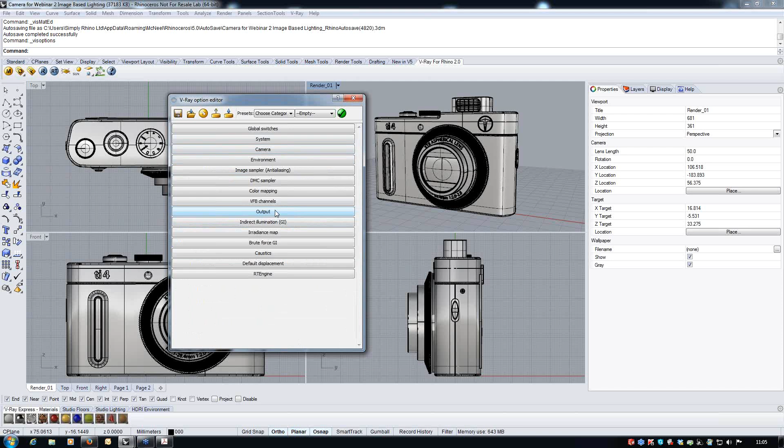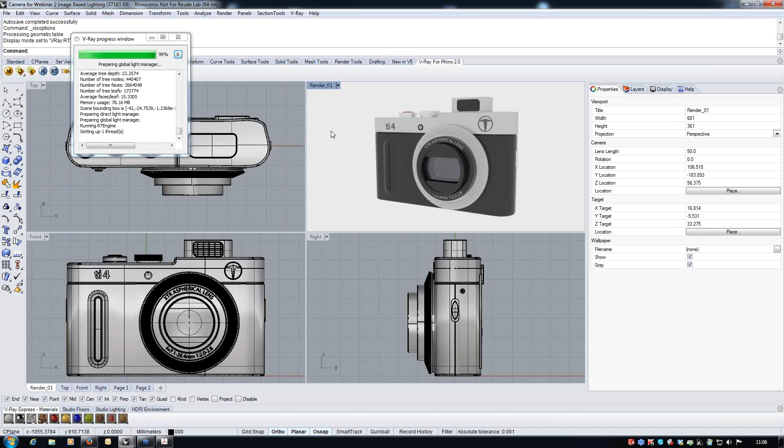We already have materials applied to this scene, and if I just turn on RT for this scene here, we'll see that the materials are applied, but because we've got no ground plane or reflective environment, then everything looks rather uninspiring. So let's look at quickly loading in a couple of things that can start to make our scene look a little more worthwhile.

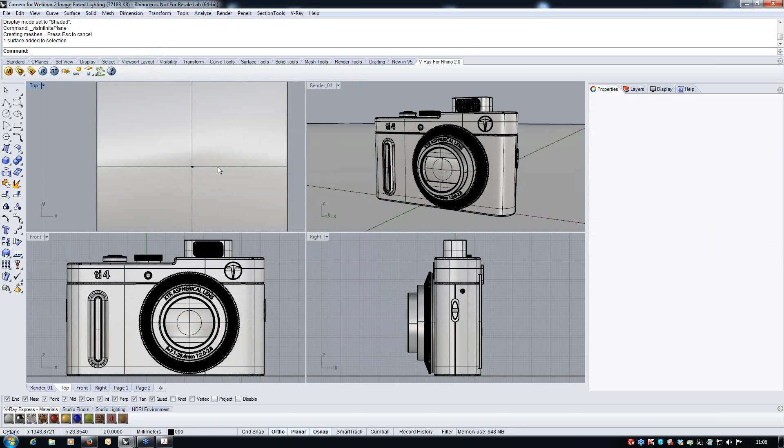So first of all, I'm going to load in a ground plane, and in this setup I'm going to use the VRay Infinite plane. Now this plane, when you see it in Rhino, actually has a finite size to it, but when this renders it extends all the way to the horizon.

This type of ground plane is good for a quick setup, but if you are doing something more detailed that requires any mapping applied to it, then it's not a suitable system to use. But for a quick setup, it's very useful.

Next up, I'm going to load in a VRay dome light. All of the VRay lights are contained in our VRay lights panel, which we can pull out from our VRay toolbar, and the dome light is this tool here. Now the metaphor for a dome light is a hemisphere, and we position where we want the center of the dome light and just drag out the cursor to give this dome light a size.

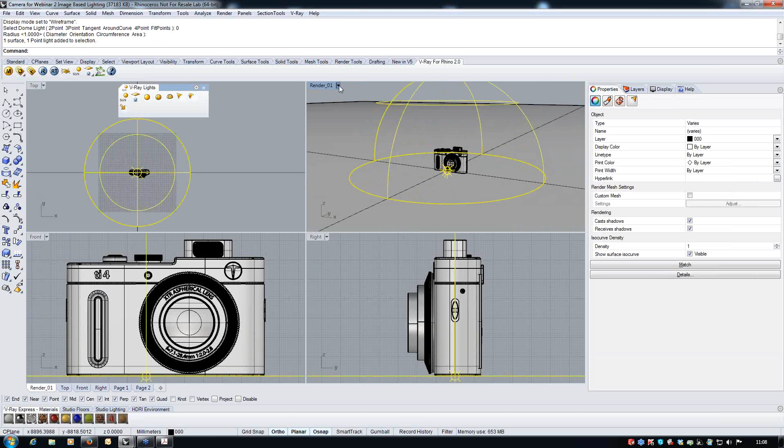It's important to understand that the dome light we're loading in here is really just a metaphor, so the size of the dome isn't that important. You'll see the dome actually surrounding the scene here, so don't worry if the dome is smaller than some of the elements in your scene. It really is just a metaphor.

Once we've loaded in the dome light, we can then pick the dome light and go to our light properties, and you'll see here that we have the option of being able to load in a dome texture.

In the last webinar we explained that there is a skylight component in VRay, and the dome light can be thought of as a sort of localized version of the skylight, with the exception that rather than the skylight, where the light is coming uniformly from all over the hemisphere...

...if we use an image to light with, then we will have directional illumination. The other big difference between the dome light and the skylight is that the dome light is real direct illumination, whereas the skylight is indirect illumination. So what that means is that the dome light will produce proper contact shadows, and it's fairly easy to produce clean results with it.

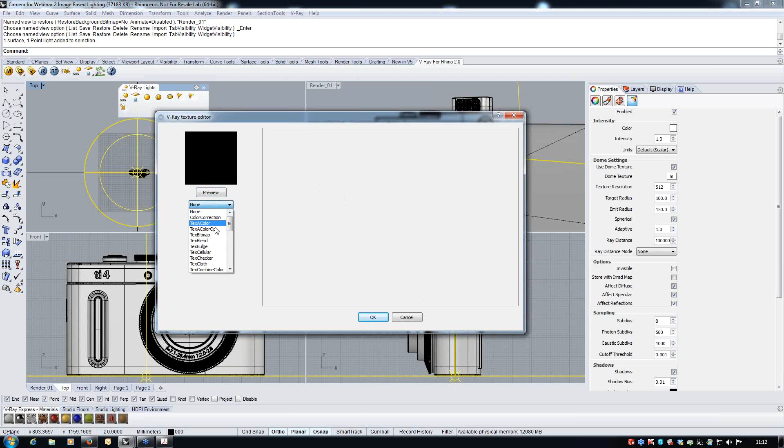Now this is the same VRay texture editor that we use for textures at all levels in Rhino. So that would be materials, lighting, environment, all use the same texture editor. So here we need to click a type, so I'm going to choose bitmap, and then I'm going to navigate to a folder I have of HDR images, and I'm going to choose this one here, which is Studio 10. On these images here, you'll see I've got little previews which show me what the lighting looks like from these. I'm going to load that texture in.

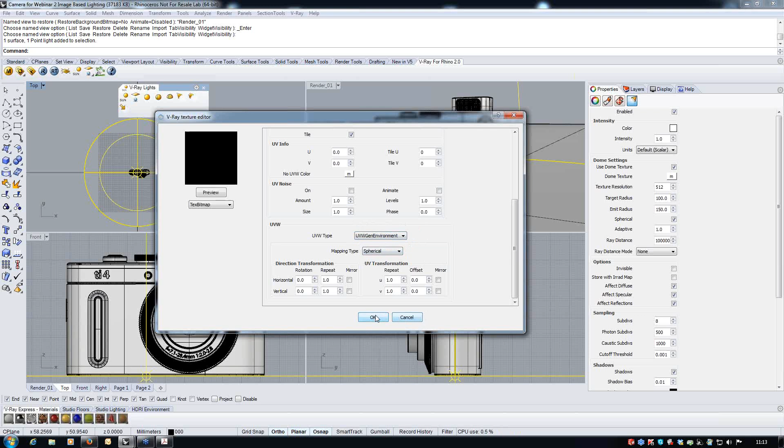Now, an important step that I need to do here is to make sure that my mapping type here, my UVW mapping, is set to environment. You should do this whenever you're loading in a texture that you're going to use for either a skylight, a background, or a dome light. And the mapping type here should match the mapping type of the image itself. So we can load that in and then look at my RT image now. And you'll see that we're starting to see some more realistic illumination going on.

So here, because we're not using the physical camera, I'm going to increase the brightness of the scene by increasing the brightness of the dome light. You can see here that as I change that multiplier for the dome light from 1 to 2, you can see the scene becomes brighter.

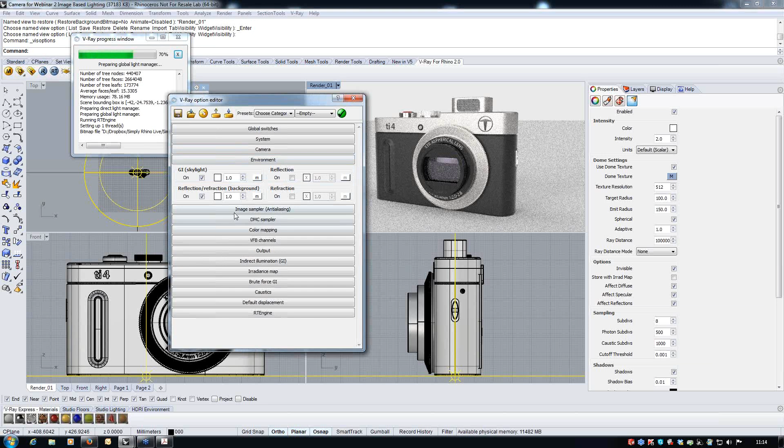Okay, now the other thing that you'll see here is that the dome light, the image that we use on the dome light, is visible in the background here. So if we want to make that not so, then we can go again to our dome light settings here, and we can check invisible. And now we'll see the white background that is created here in our environment tab. So again, very similar sort of way of being able to make the dome light invisible, very similar kind of setup to what we were introducing in the last webinar in the environment tab itself.

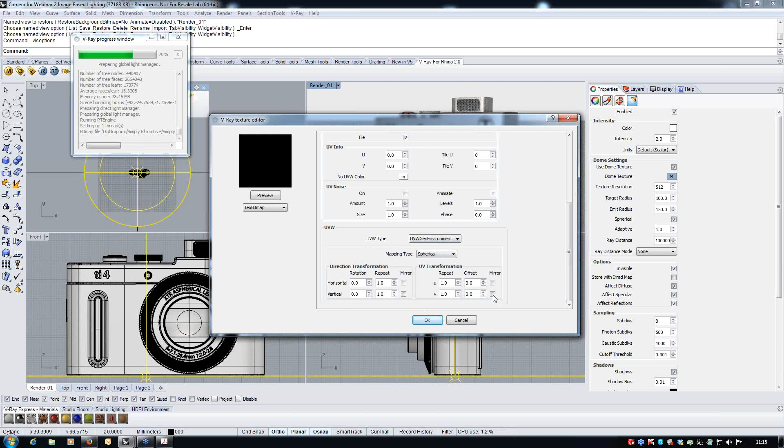So once we've got the dome light set up, it's very easy to, for example, change the texture in here. So let's just put a slightly different texture in here. And also, sorry, I should go back to this. If we want to actually rotate the image around the sphere, in other words, we can move the bright areas around and change our directional lighting. We can do this by these rotational tools here inside the texture editor. So I'm just going to increase the brightness now, just slightly more here. Okay, you'll see that brightness increase here.

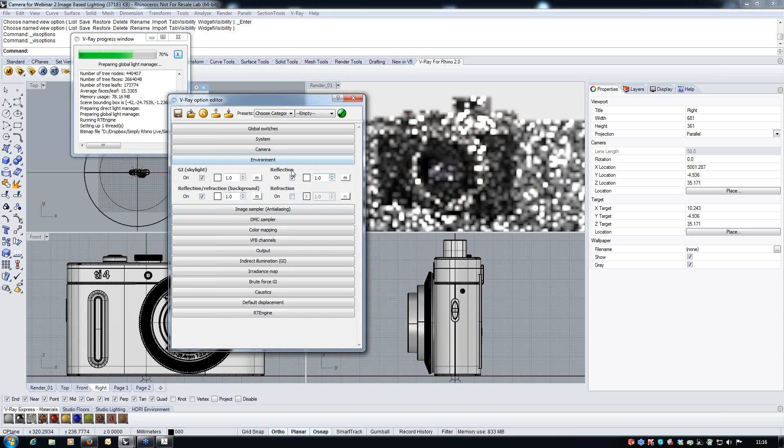And let's look at something else that we can do now. If I, for example, want to light with the dome light, but I want to have slightly different reflections than the dome light is giving me, then what I can do is two quick things. I can go to my VRay options. In my reflection tab here, I can load in a texture map. So let's use another HDR image here, and let's use a slightly warmer scene here. So I can load this in. Again, check that this is set to environment. You can always preview here just to see what I get.

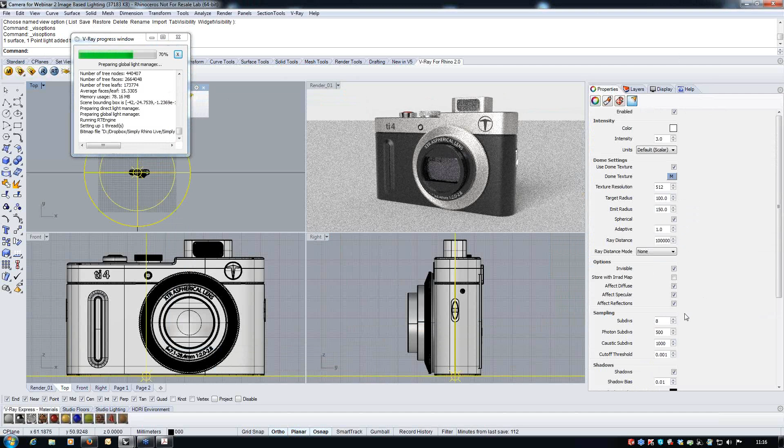No change here in VRay at the moment, but if I click on the dome light, go to my light settings, and I now uncheck Affect Reflections, then you'll now see the warmer tones coming into here, because my reflections now are not coming from the dome light, but they're coming from the environment. So you can see here there's quite a few levels that we can play with here, just in very simple terms. And really the idea of the dome light is that it gives us a very, very quick way of creating illumination. We can already see here we're getting some nice good contact shadows going on, even though we've got a fairly low quality preview that we're looking at the moment.

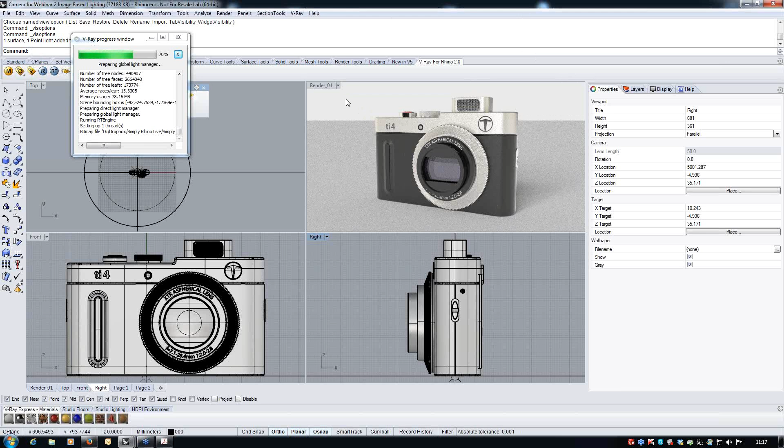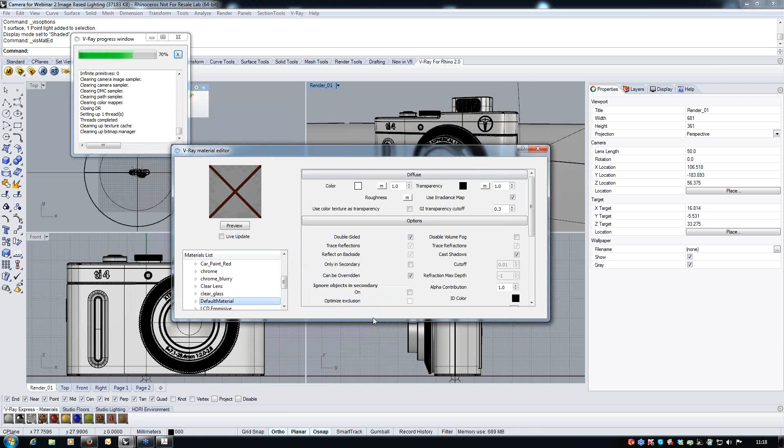So let's now just go back to shaded mode here just for a moment, and I'm going to now go to my materials editor, and I am going to create a new material in here to add to the infinite ground plane. So to create a new material, I right-click on Scene Materials here, and I'm going to create a standard material. I'm going to give this a diffuse color of white, and I'm going to create a reflection layer and leave that at its full gloss here, and I'm just going to change the name of this material so I can find it, and I'll call it white ground plane.

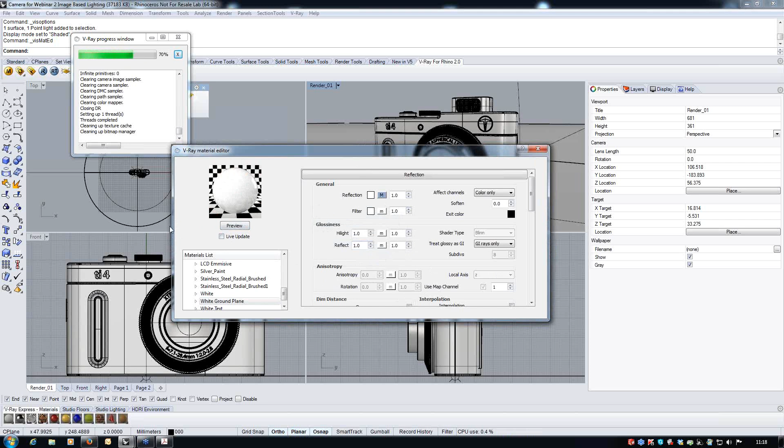Pressure's on here to make sure I spell this right. Okay, so white ground plane material, and we can preview that material here. And then to apply that to the ground plane, we apply material to selection.

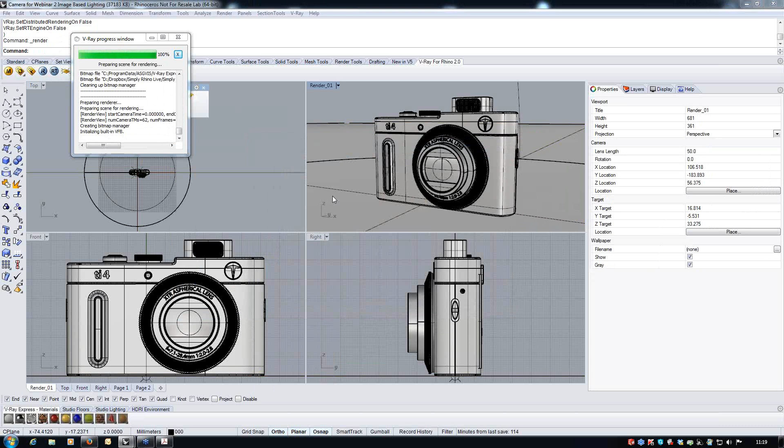So I'm going to switch the way that I'm rendering here, and I'm going to just use the production renderer now, just to show you a couple of things that are going on in the production renderer. So again, it would help massively if I rendered the right view here, so let's do that. There we go. So again, we see the image, and we now see our reflective ground plane.

Okay, so the image is fairly coarse at the moment. We're not that concerned about that, and we'll just let this render out before we go on to look at a couple of things that we can do to improve the studio scene.

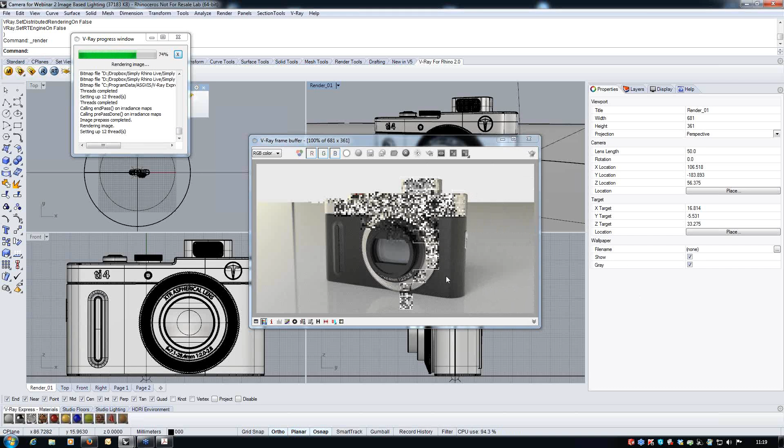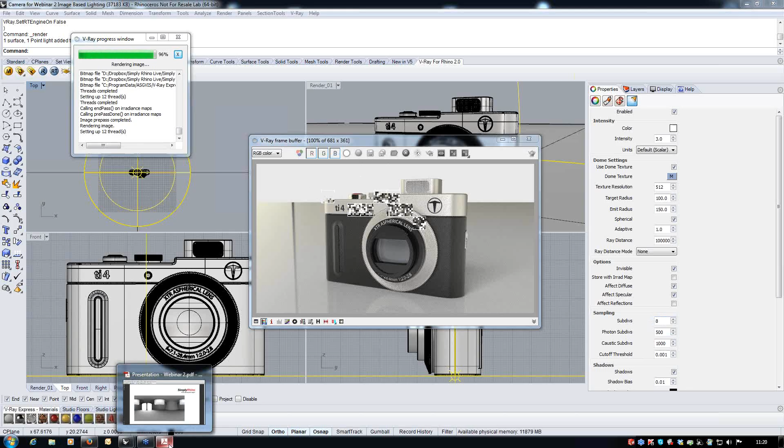Okay, whilst this is rendering, one of the things that we can do, that we'll demonstrate later on, to reduce the amount of noise that's in the image is to increase the amount of subdivisions that are in the dome light. Now, it's important to understand that across the board in VRay, there are a lot of things that you can do with subdivisions.

So the idea is that you should be careful about how you increase the amount of subdivisions and not go too over the top with the number of subdivisions when you want to refine the image. Also, there are some areas in VRay that we'll look at later on in the webinar series where actually increasing subdivisions locally is probably not a good thing to do. With the dome light, it's certainly a good workflow.

So we've got our baseline image here. Now, one of the things that we can do when we have the production renderer is we can use the region render button here. And I'm just going to take a small area here and look at a couple of things that we can do with the ground plane material. One of the problems, of course, if you have a reflective ground plane material is that ground plane is going to reflect the environment, which in this case is our slightly warm HDR.

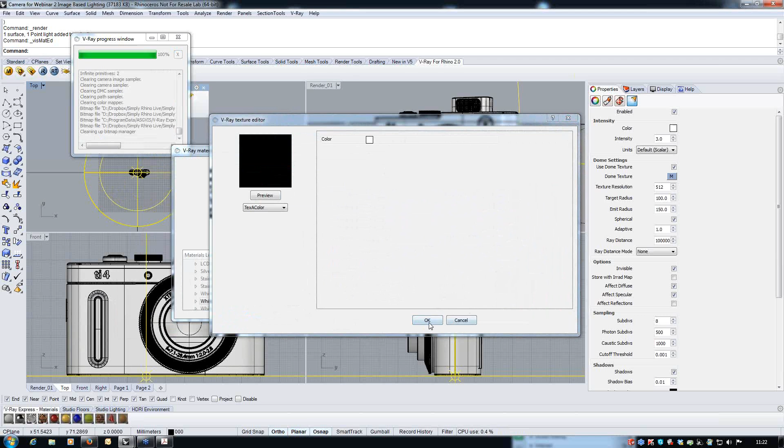Now, if we want to make the ground plane look more neutral, so it has more in common with the background, then there is an interesting thing we can do with the material here. So I'll go back to my ground plane material, and you'll see that here I can actually override the reflection on a per material basis. And if I use what's called a texture color here, and I set this to white, then what should happen now is that I'll get a white reflection from the ground plane rather than the environment.

So when we come to render, you'll see now that we've lost that color cast from the environment. So this is a really useful thing to do when you are quickly setting up a studio scene.

Next thing that we can do, and one of the things that you might well do in post-production, is to actually have the reflection fall off here, so the reflection doesn't get traced its full depth here. Again, this can be done on a per material basis, so I can go back to my material, scroll up here to my reflection layer, and I can enable here what's called a dim distance.

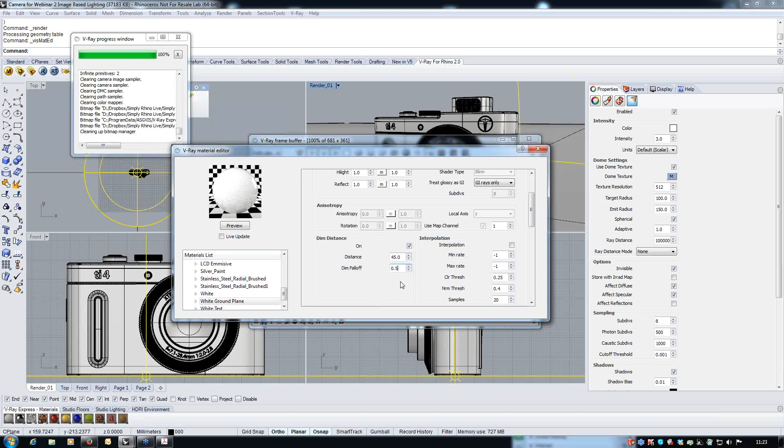I can set a distance here over which the reflection is going to be traced, and then a value here, which is essentially a value from 0 to 1, where I want that distance to actually fall off. Again, if I render this image now, you should now see that that reflection now just gradually fades out over a distance. So pretty nice way of being able to control an environment.

So you can see now that with very little work we've been able to get a kind of a white studio environment with a reflective floor where we can reduce the amount of reflection here with the dim distance, and we can cull the color cast and the background, the environmental reflection from the ground plane by overriding it.

Let's just quickly look at trying to reduce some of the noise here. Let's maybe look at this area here and increase the subdivisions here of our dome light to something like 24, and just render a small area again here, and then I'll zoom in and we should be able to see the difference in the noise. In fact, you can see the difference in the noise already here. Let's actually do it down here as well, so you can compare like for like, and then I'll zoom in.

Okay, so if I just turn this off and just zoom in here, you can clearly see how that noise is being cleared out. So one of the nice things about the dome light is that when you increase the number of subdivisions, as long as you do this carefully, the render times don't go up too much, so that we can get a very, very clean render very, very easily with the dome light.

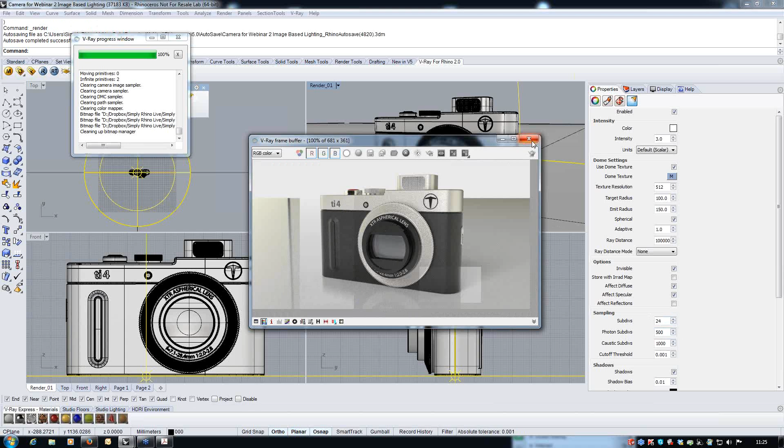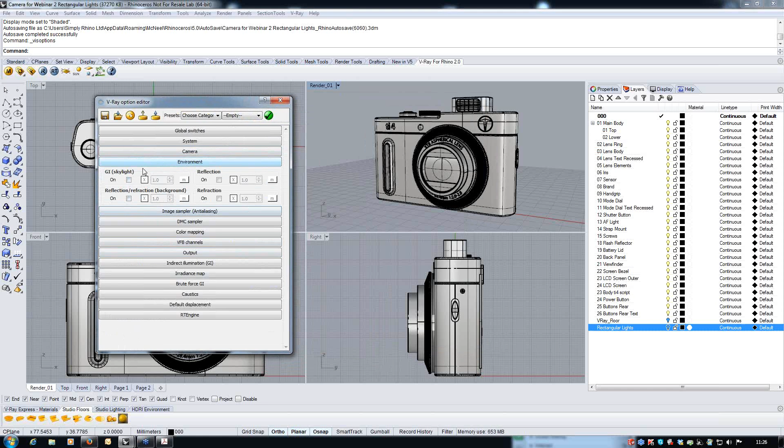So let's look now at creating a slightly different type of image by using the VRay rectangular lights. And the sort of setup that we might use for this would be slightly different. So if we can go to our VRay options here, what I would choose to do here is to make sure that the physical camera is turned on. This is actually turned on by default in VRay 2.0, and I'm going to turn off the skylight and the reflection, the background as well. So we've got no ambient or environmental lighting going on whatsoever here.

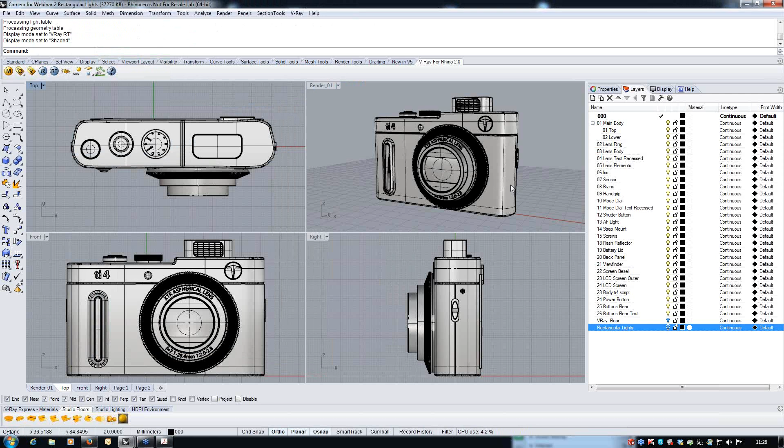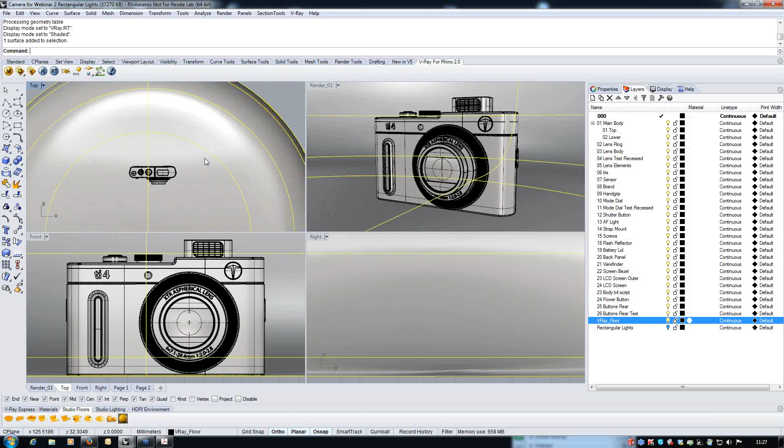And needless to say, if I was to produce an RT render of this, we're going to see essentially nothing, because we've got no lighting going on in the scene. So I've actually got some rectangular lights already set up and a floor already set up here, just so we can quickly explain how these work. Now the floor that we've got set up here is just a sort of a revolved surface that our camera is sitting inside of, and it's much more controllable when you are creating a product to use some sort of geometry as a studio floor or a background, rather than using the infinite plane.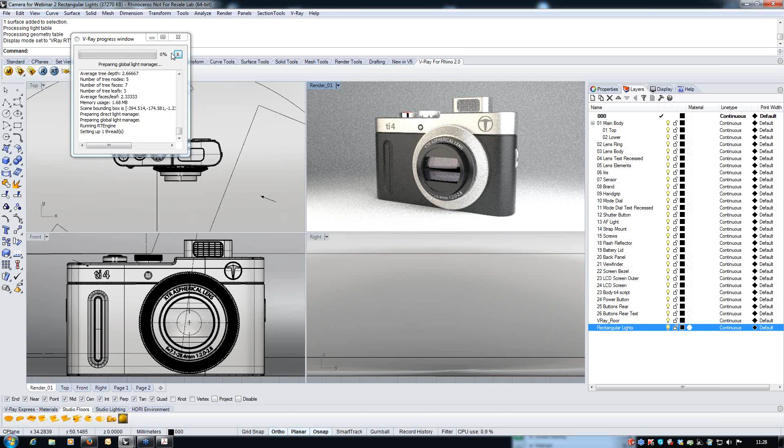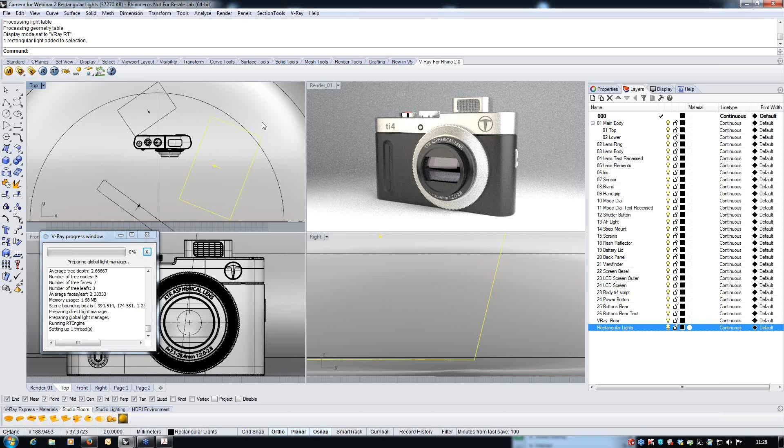And I'm going to turn on some rectangular lights here which are set up, and just take a quick look at an RT render now. So now we've got the physical camera on, and we've got the RT render on with our rectangular lights, and you can see that we've got the beginnings of a scene which might start to look interesting here. Now, the rectangular lights here are fairly easy to configure. I'll explain in a moment how one might create a rectangular light from scratch. But the lights are fairly easy to configure and understand.

So when the lights are at their default scalar settings, then the size of the light is proportional to its brightness. In other words, at a given multiplier, in this case 20, if I were to make this light twice as big, then it would be twice as bright, and if I make it half as big in terms of its surface area, let's say, then it would be the same amount less bright. So in terms of surface area, if I made it a quarter of the size in surface area, then it would be a quarter as bright. And you can see this just very crudely here, that if I, for example, go to scale 3D and I scale this light here, make it smaller, then you'll see the brightness of this scene change here.

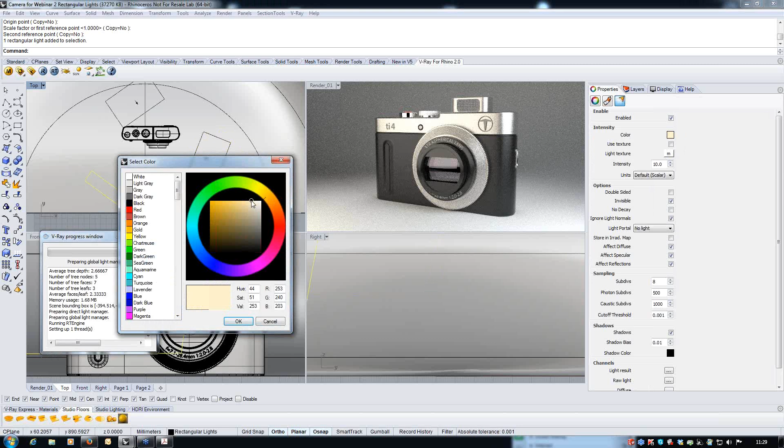Now, you can apply images or textures to the rectangular lights, but here we have just got some coloration, and it's important with that if you are going to apply any colors to the light, that really these colors should be very, very, very pale.

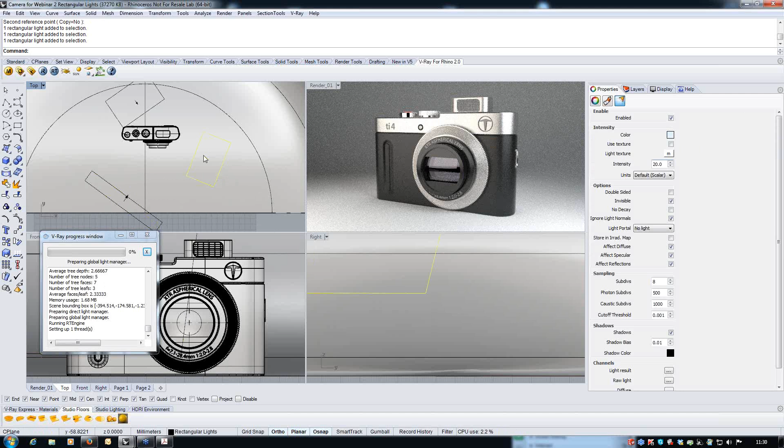You'll see that even though we've got a kind of a barely discernible color now, we're still getting quite a lot of color cast coming into this scene. Now, a setup that quite a lot of people use is they'll use one warm rectangular light here and maybe a cooler rectangular light coming in from the side, and then this one, which is illuminating from the back, is neutral.

Generally, this idea of having 3 rectangular lights is quite a good setup to start off with. We have one light which is the kind of main light, then we have a light which is putting in some sort of feature lighting, and then a light from behind to just pick up the edges of the object, so that this improves the kind of three-dimensional nature of the scene.

So while we're at this stage here, let's just take a quick look as well at the physical camera and how we might use this to control exposure. So when the physical camera is on, by default this exposure setting here is checked, and we can control the exposure by one of 3 means. We can use the shutter speed here, we can use the F number, and we can use the film speed.

So in terms of the shutter speed here, what we're seeing here is the inverse of the shutter speed. So 30 is equivalent to 1/30th of a second. And all of these controls here behave exactly the same as on a 35mm film or 35mm digital camera. So 30th of a second, if we increase that to 1/60th of a second, then we'll be letting less light into the scene, and our exposure becomes less.

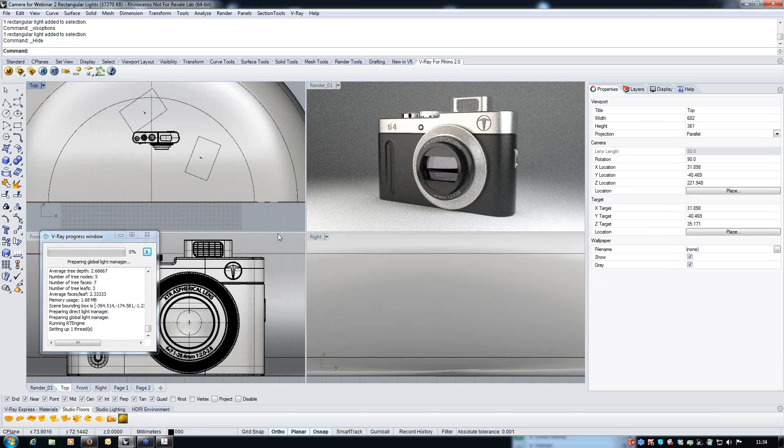Doesn't make a lot of difference, but let's increase this by a little bit more here, just to prove a point. Okay, and let's set that back for the next step. Okay, so let's look now at some other properties of the rectangular light. In fact, before we do that, let's just temporarily hide this light here, and when we do this, you'll see that our scene dims.

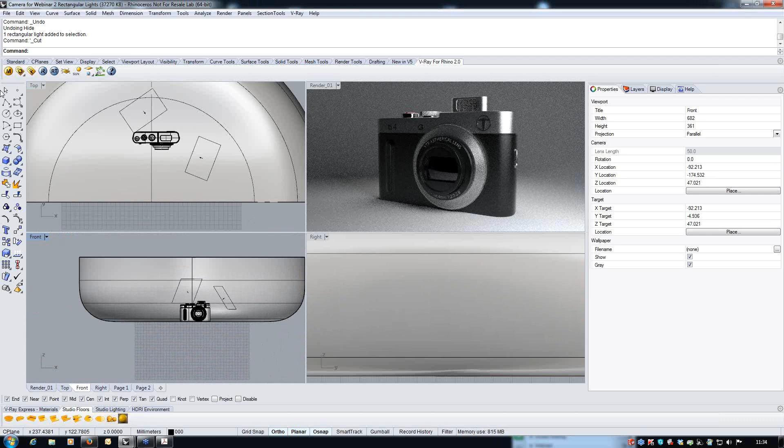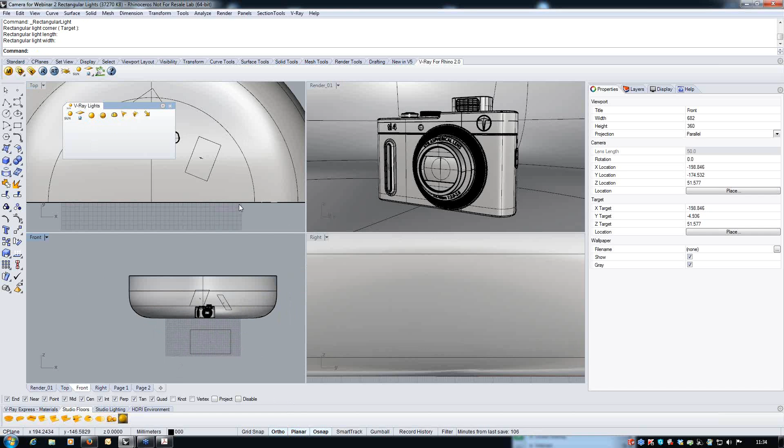And let's have a look at how we create a rectangular light from scratch. So we do this from our lights toolbar here, and this is the icon for rectangular light, and we essentially first of all draw a rectangle, and we describe this by describing its 2 sides, and this rectangle will have a vector. Okay, let's just pull this forward here.

Now, if we want to change the vector direction here, we can do the normal Rhino thing of picking the object and just typing in flip and enter, and you'll be able to change the vector. You can do this in Rhino to flip the direction of anything. You don't need to actually go into the direction menu. You can just type flip.

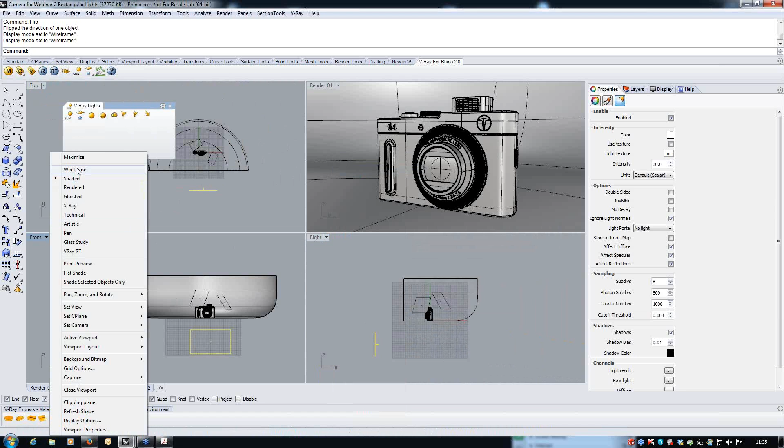So a good way of setting up the rectangular lights is to do this in the ortho views here. Just switch these to wireframe so I can see what's going on, and push this rectangular light about here and gradually manipulate this into position.

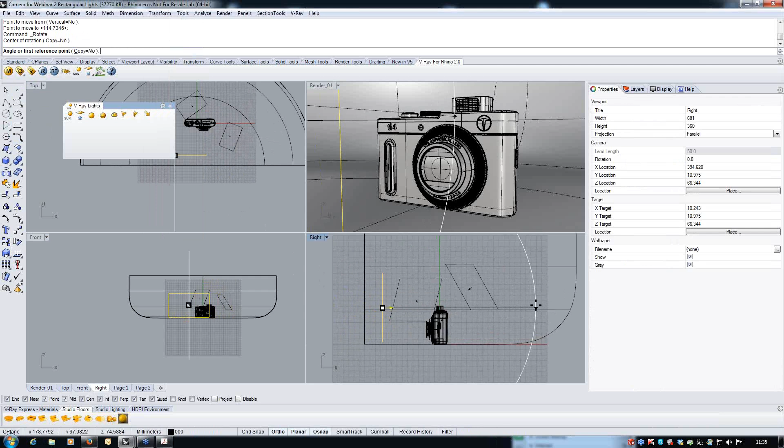Okay, now the rectangular light usefully now has got snaps to it, so I can use any of the tools here, rotate, scale, etc., and it's pretty easy to get the rectangular light pointing at our target object here.

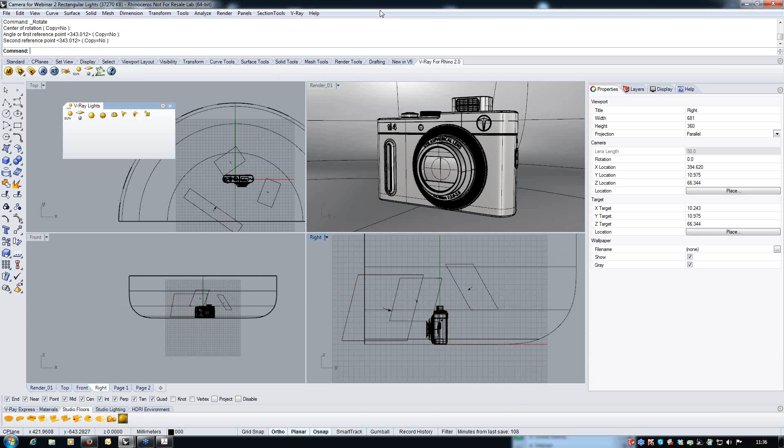Now, one thing to be a little wary of is that by default in version 2 of VRay for Rhino, the rectangular light is set to an intensity of 30, which is probably much brighter than you would need in a scene like this. So let's just load this up again, and we should see now that we are getting something close to what we had previously. Okay, so this was with our new light here.

So again, what you will find with the multipliers of these lights is that they are fairly subtle. So if here, for example, we've gone from 6 to 8, we don't see a massive difference in the illumination. Whereas if you are using some other multipliers in VRay, they are less subtle than this. So rectangular lights are fairly subtle, and that makes them really useful for creating a studio scene.

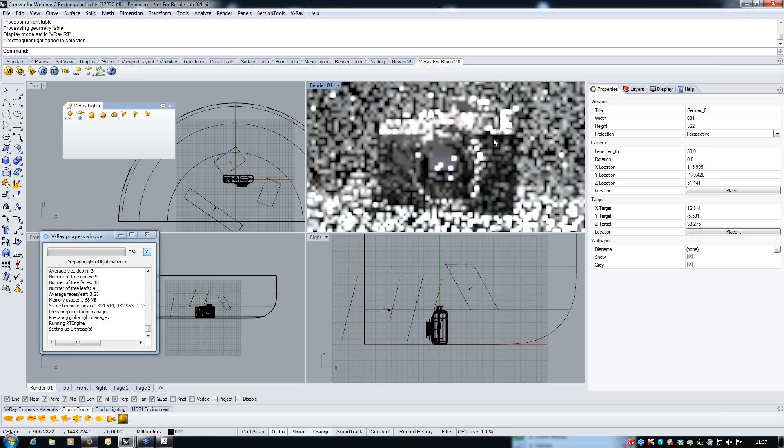Okay, the other thing that's important with the rectangular lights, if I just zoom out here, is that by default they are not set as being invisible, so they will get in the way of the camera. So we need to check the invisible tab here, and then that light becomes invisible.

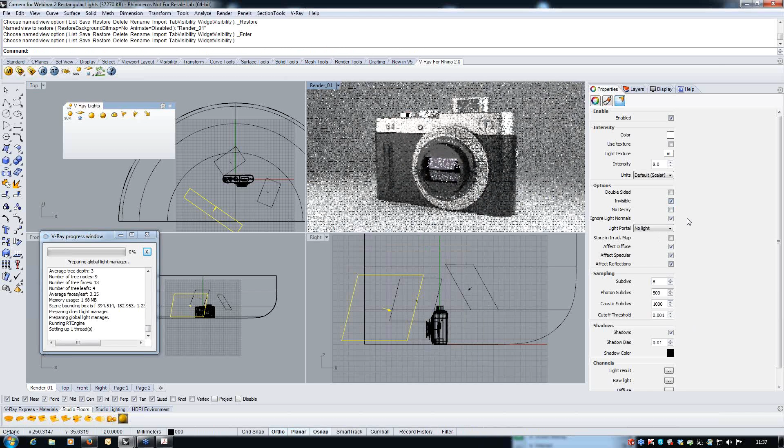Just a few of the other properties here. Affecting diffuse, specular, and reflections. Affect diffuse means the color of the light will affect the color of the object here. Affecting specular will mean that we'll see the result of the light in the specular highlights, and reflections mean that we'll actually see the rectangular light, there it is here, in the reflections of the object.

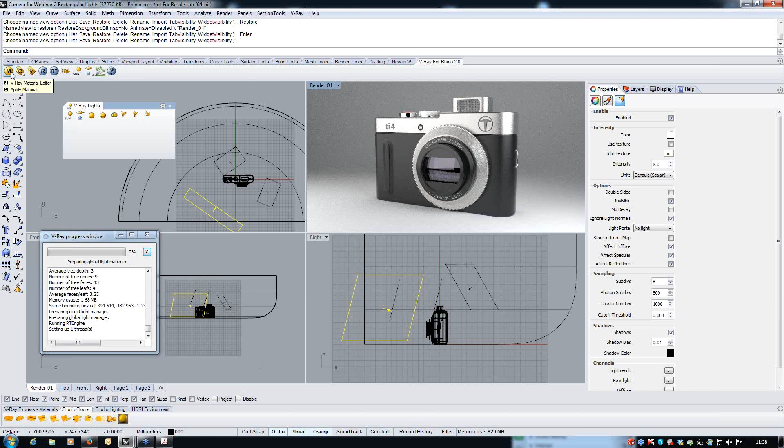We'll look at some of these other properties when we come to look at some of the architectural setups in VRay for Rhino. So let's just look at a couple of other very quick things now to make this scene slightly more atmospheric. And one of the things that we can do here, let's actually create this material from scratch, is to create a black material which again can be reflective.

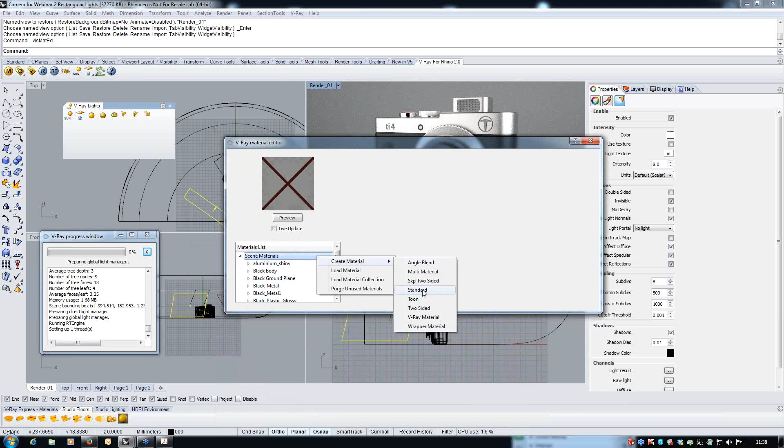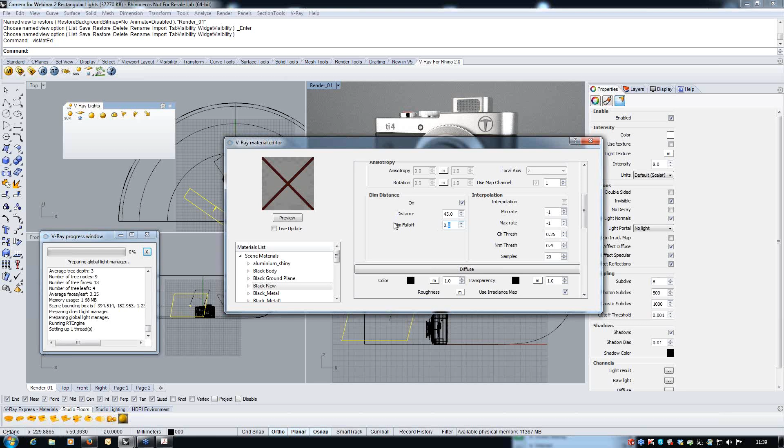So let's again just create this material here. So we'll create a standard material. We'll make this black. We'll create a reflection layer. Give this a name as well. And we'll use the dim distance setting that we were using before. Just preview this, and then let's apply this here.

And you'll see that once we start to do this, we are getting a result which is much more atmospheric. And this is the type of result that is pretty hard to achieve using the image-based dome light scenario that we were looking at before, and it's actually much easier to achieve this effect using the rectangular lights and mimicking what happens in a real photographic studio. So just as in most renders, a lot of what's creating the interest here is in the background itself.

One of the things to note here is that in VRay RT, the cutoff of the dim distance is shown in a much more simplified way than it is in the production renderer.

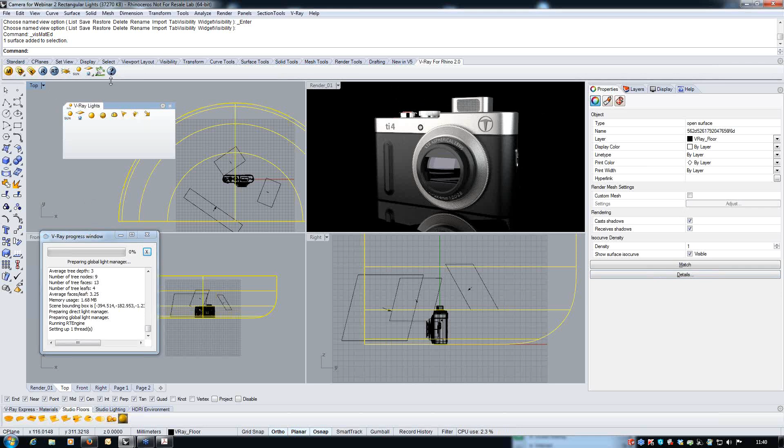Finally, one other thing that we can do here is that we can use the depth of field in our scene, and we can set this by going to our camera, turning on depth of field, and I'm actually using a slightly newer version of VRay, which is a development version, which hopefully will be a service release in the not too distant future. But I believe this button is in the VRay 2.0 shipping version,

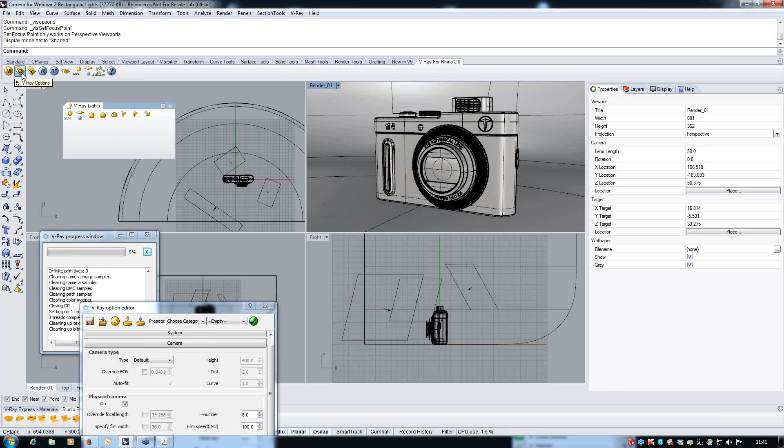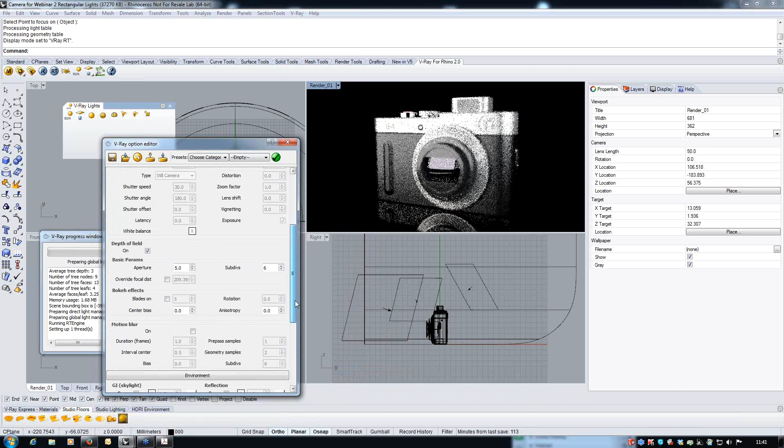and this allows me to set the focus point for my depth of field, and I can just pick on an object here and set the focus point, and I can control the blurring by setting the aperture here, the number of subdivisions, and I can also control the bokeh effects here, which are the kind of distortions in the blurring.

So pretty much that's what I wanted to go through today. I hope that's been of interest, and I look forward to receiving any questions. So I'll hand you back for the moment to Steph.

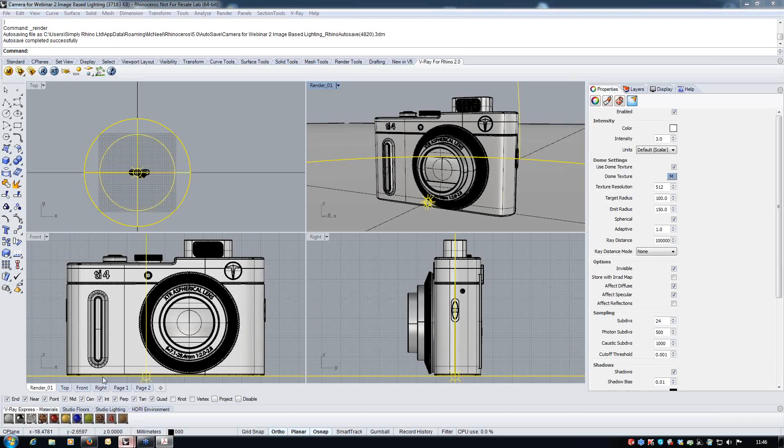Okay, so the pre-passes are controlled here. Let's just go into our VRay options. If you have, as we have here, irradiance map and brute force, then the pre-passes we can control are in irradiance map, set with these two values here: minimum rate and maximum rate. It's the difference between these two that gives you the number of pre-passes.

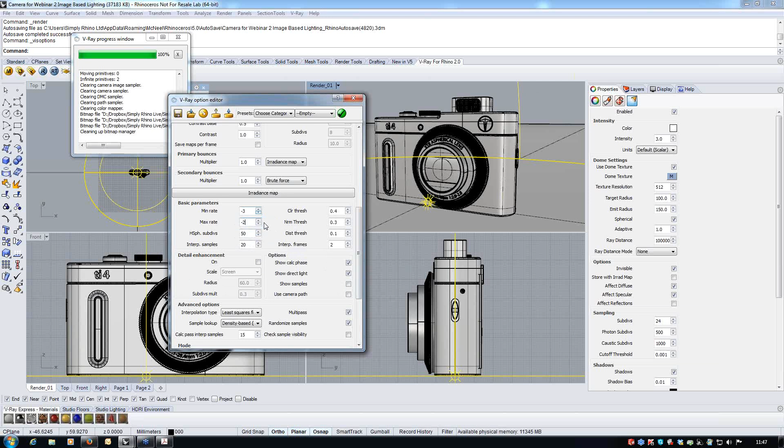The suggestion is that you don't ever have a difference of more than 5 between the minimum and the maximum rate. The idea of having a maximum rate of -2 in this case is that we are always undersampling, so we are speeding up the render. If we wanted to increase the quality, we could increase this maximum rate up to a maximum value of +1. So this is how you can control the number of pre-passes.